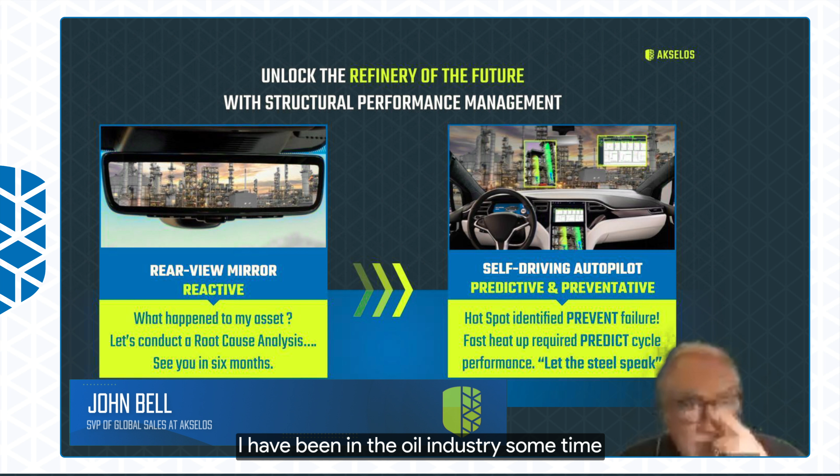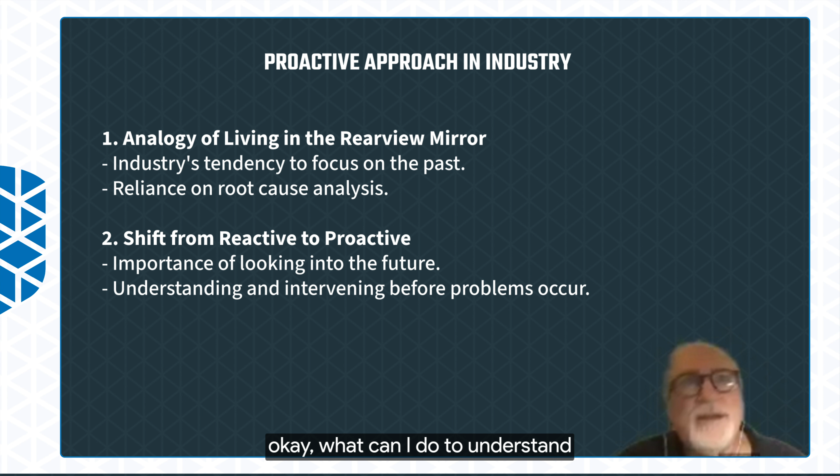I always draw this analogy. I think to date, and I've been in the oil industry some time, we're guilty of living our life in the rear view mirror. And what I mean by this, we spend a lot of time on root cause analyses. We're always in the past looking at what has happened, rather than looking into the future and saying, okay, what can I do to understand and intervene before the problem occurs?

And this is exactly what we're doing at Akselos with this proactive approach to understand the future operating conditions. And speaking to customers, we keep seeing three main themes: aging infrastructure and equipment, downtime, and the opportunity of data.

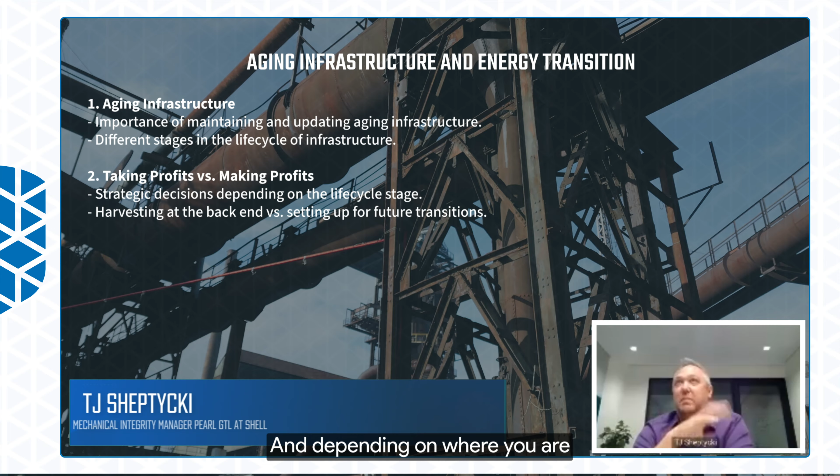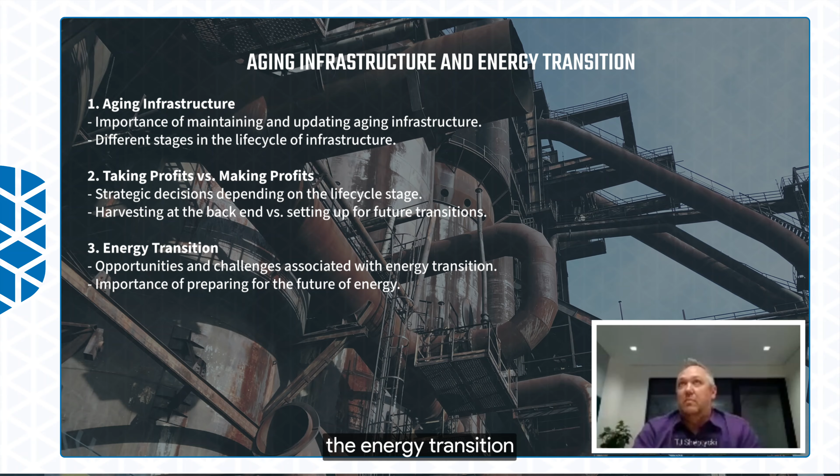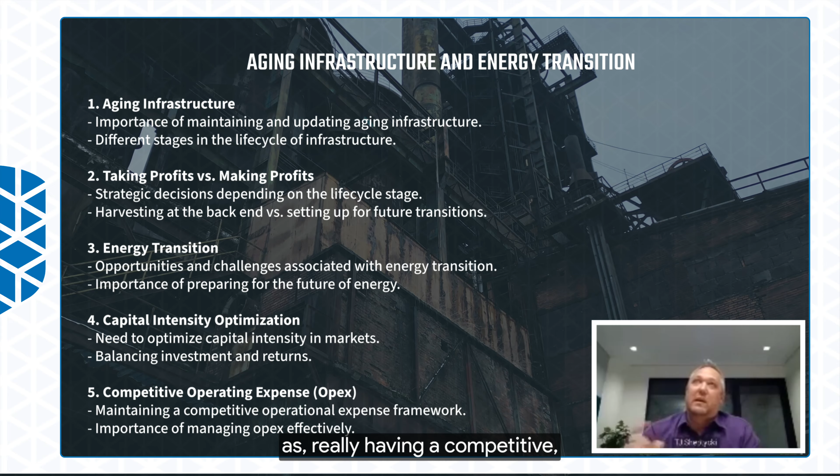TJ, it would be great if you can share some of the challenges that you face in your line of work. I think, just around that aging infrastructure, something called taking profits and making profits. And depending on where you are in the cycle, we're all in different areas of the life cycle of our kit, really about harvesting the back end or really setting yourself up for the energy transition and what that might bring. And I think there's a huge opportunity, and a challenge around optimizing the capital intensity of our kit, as well as really having a competitive OPEX frame.

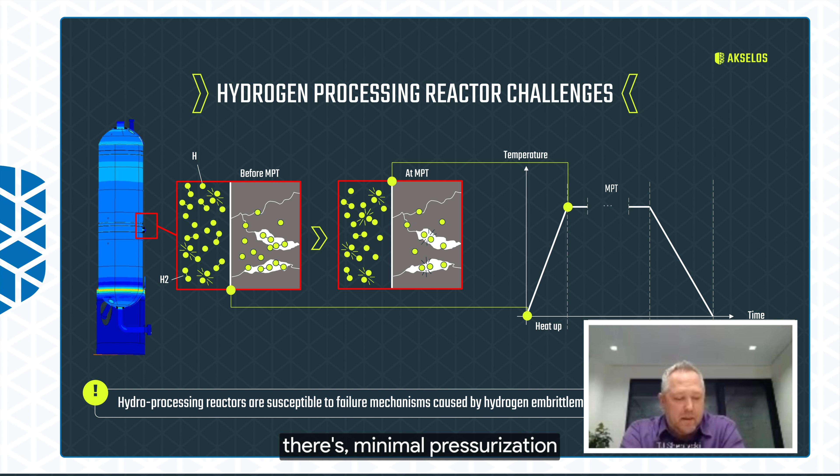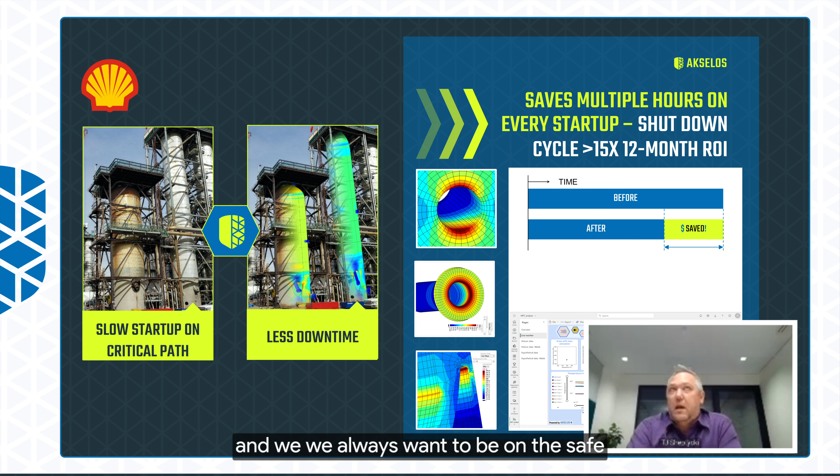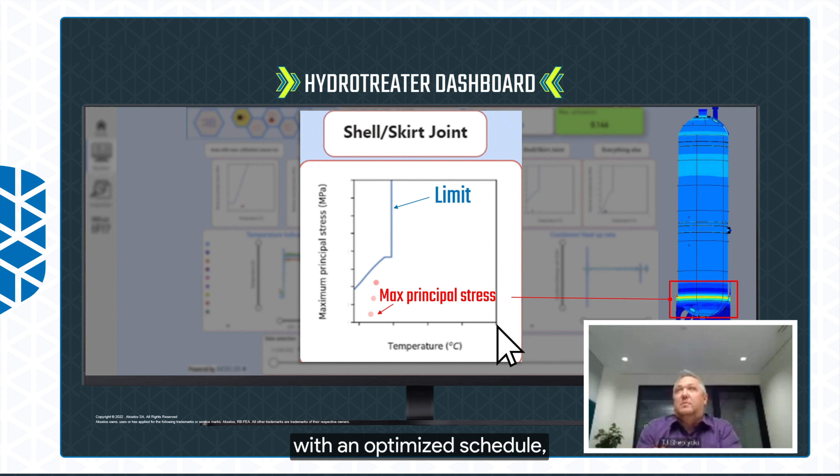So this is a heavy wall vessel in a hydroprocessing unit. And with heavy wall vessels, there are minimum pressurization temperatures to avoid brittle fracture. That often involves a rate of change, so a cool down rate as we're shutting the plant down, and a heat up rate when we're starting it up. We always want to be on the safe side of those rates to avoid that process safety brittle fracture risk. We really wanted to understand how we can do it with an optimized schedule while protecting the asset's integrity.

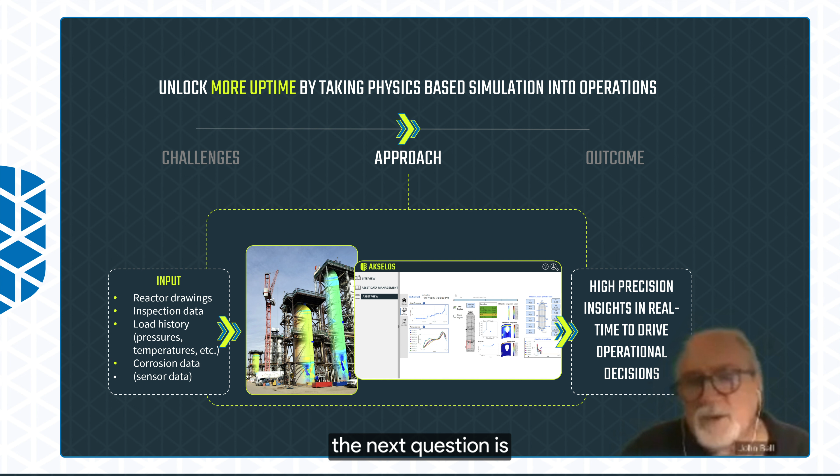For Shell, we delivered a dashboard that looks like the one on the screen. What the dashboard actually enables are high precision insights in real time to drive operational decisions. So naturally, the next question is, what kind of decisions? On the screen, you can see a range of use cases around which we improve decision-making to drive better outcomes.

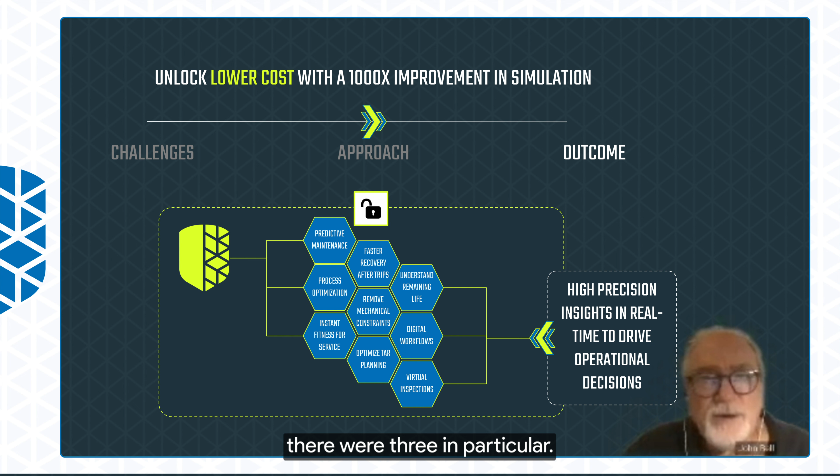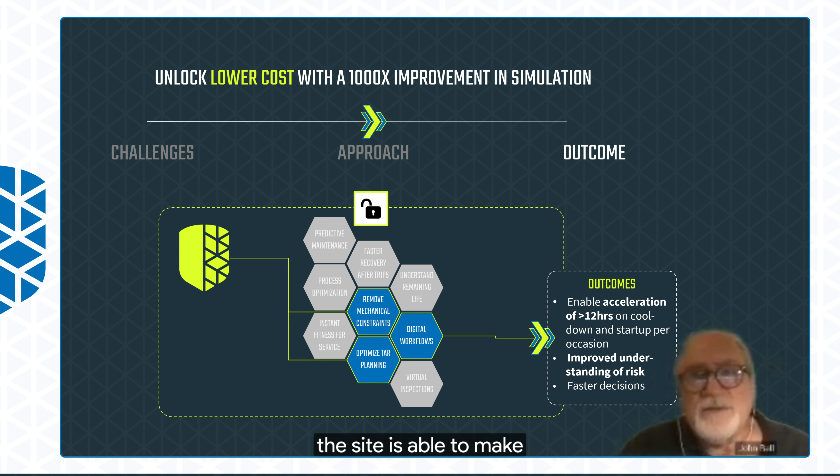In this example, there were three in particular. Removing mechanical constraints—this was about deciding how much faster the reactor could be started up in a safe manner. With digital workflows here, the site is able to make these kinds of decisions as the operation unfolds.

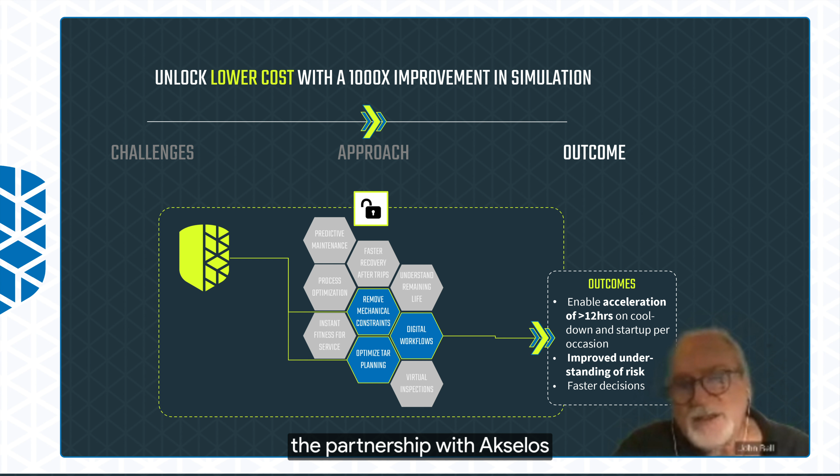This is real-time updates of the condition of the asset. This was simply not possible before the partnership with Akselos. It's just not possible with other simulation technology. And the team is significantly better able to understand which areas of the reactor are at risk.